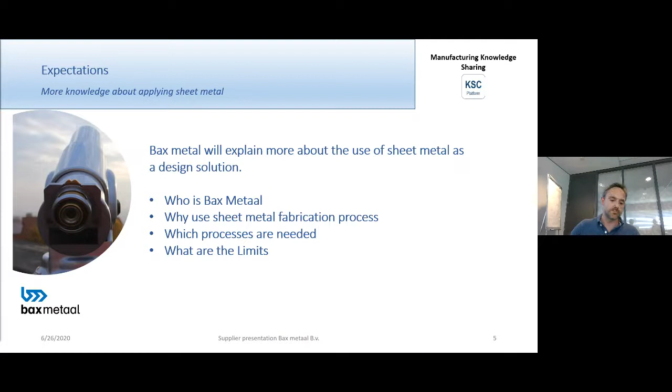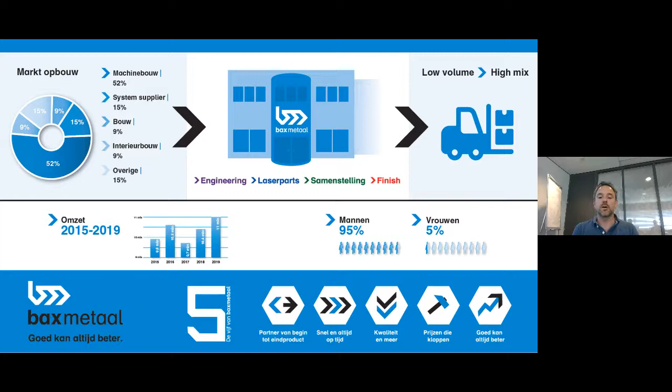I will explain more about the solutions that we offer in sheet metal. I'm going to tell you who is Bax Metaal, why you should use sheet metal, which processes are needed to produce sheet metal parts, and what are the limits. So starting with who is Bax Metaal. I'm going to show you in the next two slides. The first one, we have an overview of how our client base is divided. On the left top corner, you see that the biggest part of our clients are OEMers, original equipment manufacturers, then system suppliers, a little bit construction, and some other markets.

Moving to the right, you see our core processes at Bax Metaal: engineering, laser parts, assemblies or samenstellingen as it says here, and finishing. Starting with engineering, we do mostly co-engineering. So our clients have an idea of what they want. They have a sketch, they have a first drawing, and we try to do all the smart things that we know with sheet metal or tubing, mainly based on laser cutting, and try to put in some value that way.

At laser parts, we laser cut the base parts, the products. At assembly, we do the bending, the preparation before welding and bending, and the final assembly of the parts. And at finish, we do the finishing of stainless steel products. That's glass bead blasting, ceramic blasting, and we do the cleaning of the products there. We can clean from grade 4 to grade 2. So grade 2 surface, that's the highest grade that we can offer.

So our product mix is really low volume, high mix. You see it more and more in our markets. The number of orders, the number of pieces to make is declining, and the difficulty of products is growing. So yeah, that's something we have to deal with. Then lower you see our revenues over the past couple of years. Not as big as ASML's, unfortunately, but for us it's good.

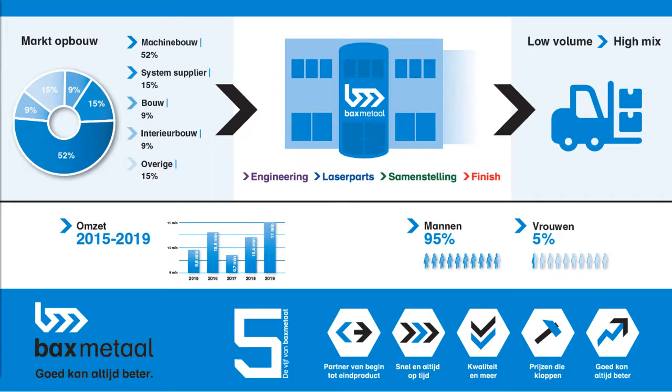The build-up of the people working at Bax Metaal, mostly it's a man's world still, only 5% female. We also have some females working on the workplace, so that's nice to have, I think. And we'll try to encourage it, but it's not that challenging, not that good for women, I think. Then the next slide.

Bax Metaal processes mainly stainless steel. 95% of the material that we process is stainless steel. The most common sorts that we use are 304 and 316, of which the 316 material is more corrosion resistant. That's because of the way the material is built up. It has some more molybdenum, and that's why the corrosion resistance is higher.

Both of the materials are non-magnetic. There are magnetic stainless steel sorts, but that's more in the 430 series. Those materials have a higher grade of carbon in it, and that's why they are magnetic. The base plates that we use at Bax Metaal are different sizes. We can use from 4 by 2 meters to 1 by 1 meters.

And that's the base plates that we lay the products in, so we try to make the most optimal nesting in the product to get the most parts from one base plate. The thickness that we can use ranges from 1 to 30 millimeters. And I have to say that 30 millimeters we don't use that often. The most we use is 1 to 4 millimeters.

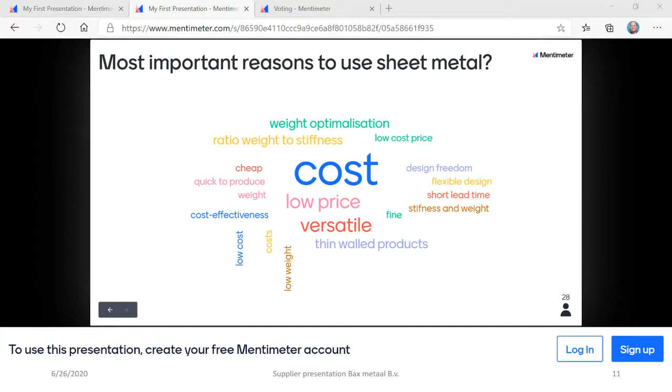Okay, let's go back to the slides. We're going to move on. So which processes are needed? I'm going to talk about laser cutting, and as I told you guys, it would seem cool to me if I could take you on a virtual tour of our factory. So all these processes I'm going to show to you in a video, and I'm going to talk through the video to explain what we're seeing. So I'm going to start with laser cutting in general. That's not a video, but the next one is.

Laser cutting of sheet metal and deburring, then laser cutting of tube. Then I'm going to show you the preparation we do before bending and welding. Then the bending of sheet metal. The next film will be welding of sheet metal and tube and some smart things we try to do there. And then something about the after treatment, so that's the glass bead blasting and ceramic blasting. And finally the cleaning. So the first video is going to start.

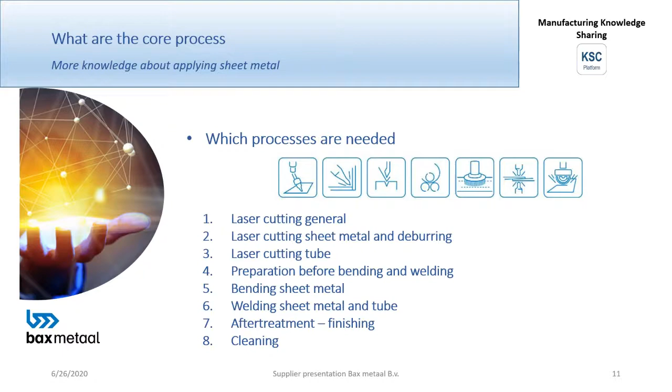I hope. Yes, the sheet. First, the sheets. I'm sorry. Yes, the laser cutting in general.

So to the right, you see the laser head. As you see, the laser beam is transported via a mirror to the nozzle. There the laser beam is concentrated to a width of 0.2 millimeters, and with that concentrated laser beam we can cut a workpiece or a product out of a base plate. The product can have all types of different shapes and sizes. So that's how the laser cutting works.

We have two types of lasers at Bax Metaal. That's the CO2 laser, and we use it for thicker materials. And we have the fiber laser that we use for thinner materials, and we can use it for different types of material.

For example, copper we can cut with a fiber laser, but we can't cut it with a CO2 laser. The speeds of the laser range between 0.5 and 10 meters per minute, where the fiber laser is the fastest of the two in the thinner sheets.

The tolerance that we use at Bax Metaal is the ISO 9013, where the smaller measurements have a higher tolerance than the greater measurements. So the longer the piece, the higher the tolerance will be. In general, we use a tolerance on laser cutting of 0.2 millimeters.

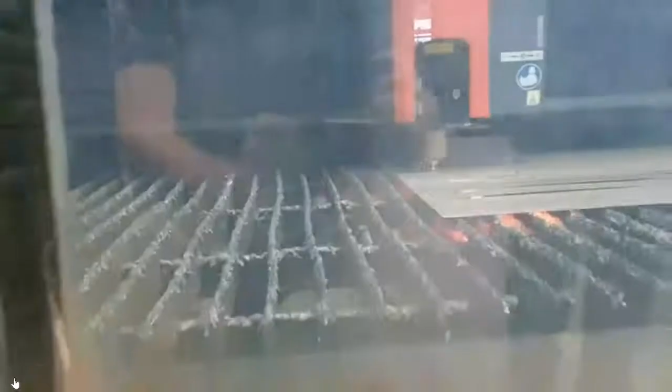Here we see the laser cutter. That's the CO2 laser that we see. Here you see the head of the laser that I talked about. The rough area that you see in the film, that's the bed that the base plate is laid on. And this explains why we always have a good side on the plate and a lesser side. So the lower side of the plate always gets a little bit of damage from the bed it's laid on.

If we cut products that are used for grade 2, we use a special bed that's filled with aluminum rings, so the base plate does not get scratched or, how do you say it? Damaged. Yes, thank you. Move on, please.

Now you see the laser cutter, it's cutting out the products. And if you just freeze here, yes, very nice. You see the big sparks on the other side. As I told you, the laser beam is concentrated to a width of 0.2 millimeters. And then we can choose between 2 types of gas, oxygen and nitrogen, which we blow under high pressure. We blow the molten material out from between the sheets. So that's what you see here. That's where the big spray is coming from.

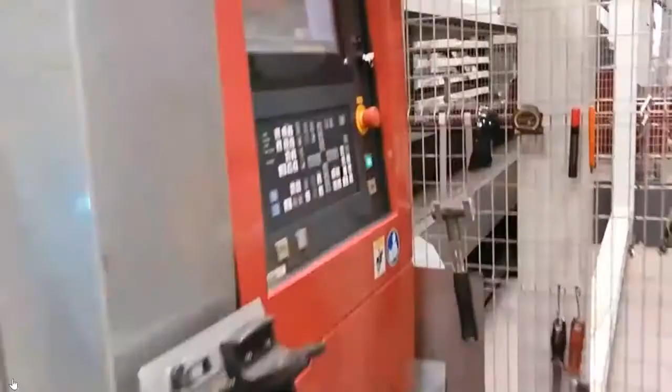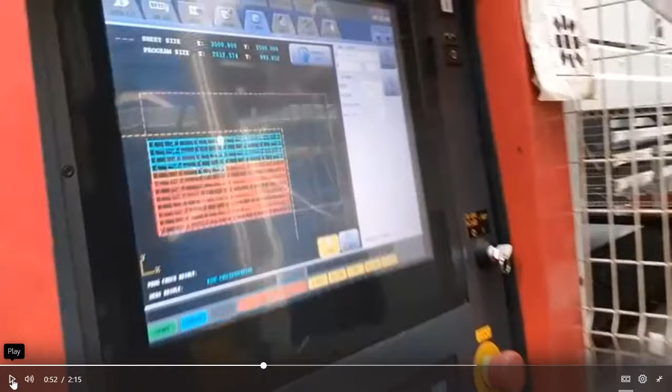So now we're moving on to look at how the machine is running its program. If you could freeze here, thank you. This is the machine running its program. You see the red parts that have already been cut. The blue parts are still waiting to be cut. The software makes an optimum nesting from the parts that we put in. So it determines from the shapes and the sizes of the product how many we can get out of one base plate, and then it makes the most optimal nesting.

Here you see the machine, the little dot, that's the laser head moving. So there you see how far it is. A little bit further, please. Thank you. Here you see a loading and unloading station. I talked about the blue pallets that we use during daytime. During daytime we cut smaller plates. At nighttime we use the loading and unloading tower that you see here for keeping the machine going at night. The machine unloads itself and puts the plates on the white pallets that you see, and then it goes into the tower, and the next morning we can get them out and sort them.

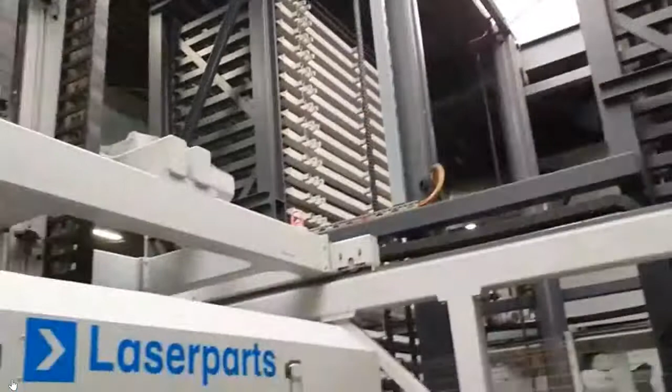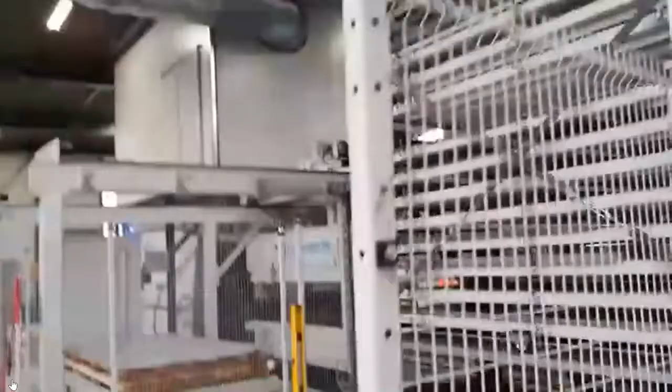You see the cut products that are waiting to be sorted. The tower again. And here you see some rest material waiting to be scrapped. Now we're going to the deburring process. Here you see one of the plates being deburred in the machines that we use for that process. Pause a bit.

You can't see it in this picture, but in front there's a grinding sheet. The grinding sheet takes off the most rough edges of the plate, and then these two brushes make a nice round edge. So when you get your product, it will be hand friendly. You don't have any sharp edges anymore, and it can be used in further processes. Here you see the product being deburred and the edges being rounded.

So it's just a bit of filming that we did on the job. As you see, it's not a professional movie.

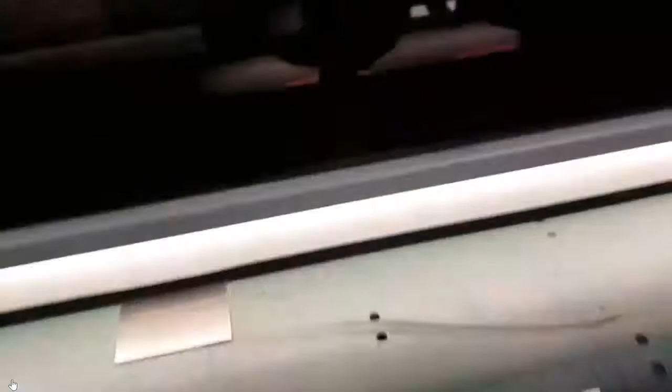Here the product is coming out of the machine, and here you see the nice round edges. All the damage is done. It's gone, I think.

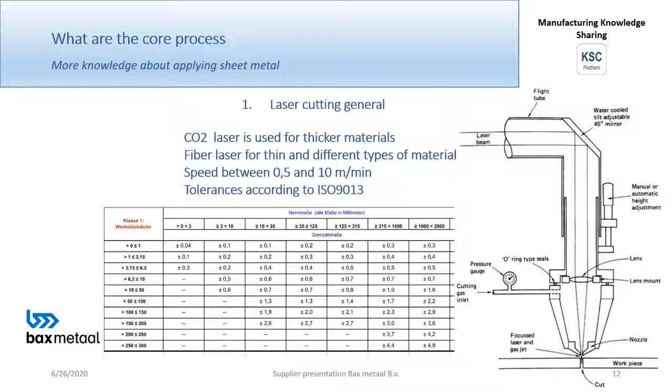Okay, thank you. And then to the next film. Right. How's it? The rest are all clips.

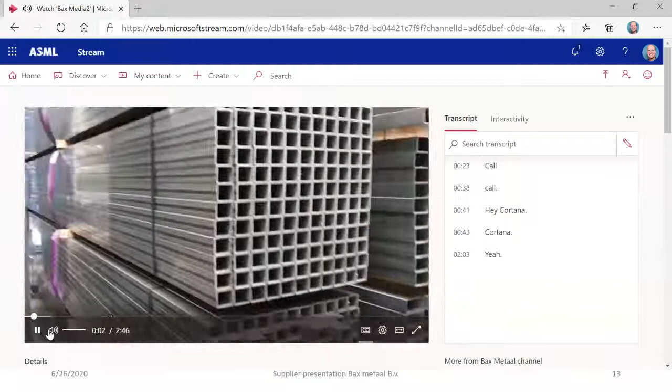Okay. The next one will be about the laser cutting of tube. So here it goes. Now, here we see the stock that we have of tubes. Also a lot of stock. They come in bundles, the tubes.

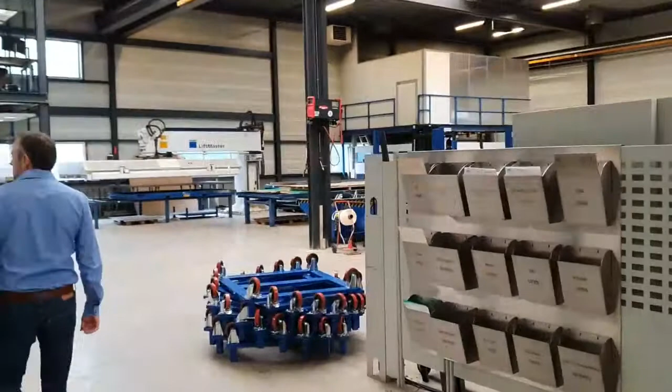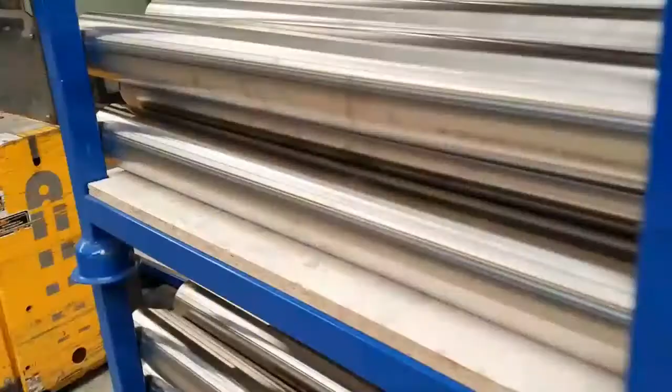And that's also one of the reasons that it's a bit challenging when we're cutting tube, because the tubes are a bulk product. They're fabricated in great numbers. Then the tolerances of the tube are very, very high. Or low, I don't know how to explain it, but the geometry of the tube can vary. And it can vary so much that the tube is less accurate than our laser is. So we can only be as accurate as the tube is. And that's a challenge that we have to face every day.

Here you see the machine loading one profile. In this case, an angular profile. So if this profile would be a little bit bent, then it influences the tolerance on the end product. And there's nothing we can do about that. Here the profile is loaded into the machine.

So the machine is going to do a measurement of the profile. And that's done. Yes. Here the machine is measuring the profile, the length of the profile, so we know exactly how long it is. And now you can see the profile is going to be loaded into a gripper. And the gripper, that's the reason why we can't cut a full profile. The profiles that we use are 6 meters. But we only can use 5.8 meters because we have to hold the profile in the end.

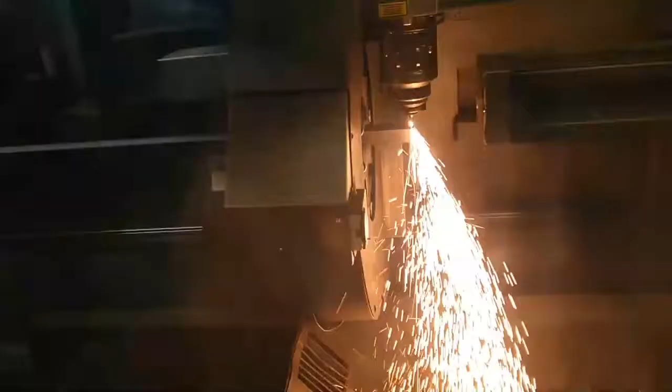So now you're going to see the cutting of the profile. You have 2 angular cuts, and it can be anything that you think of. We can cut into a tube, and then the product is already finished. So now we can go to the next clip. So that's the cutting of tube.

Now I want to show you guys some more. We're going to take the next step in our factory, and that's the preparation before bending and welding.

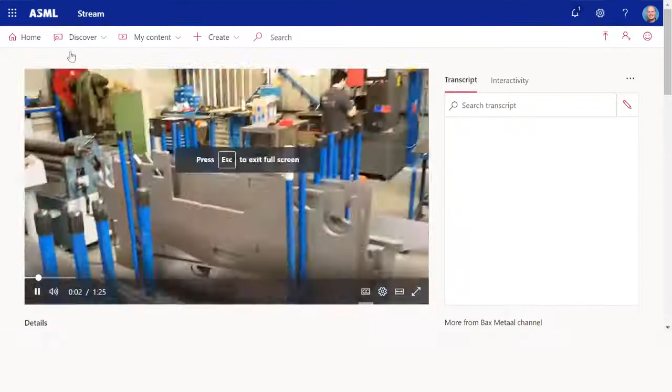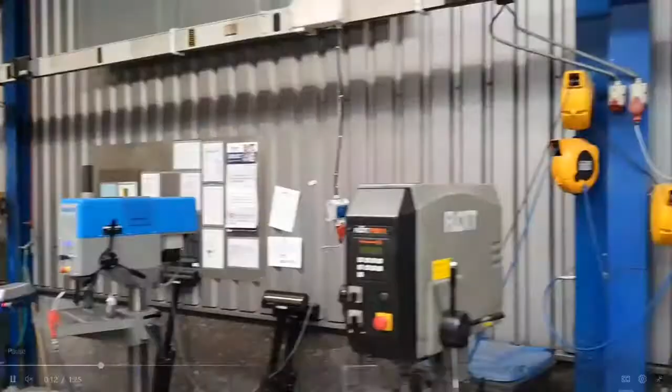So the sound. In practice, you see that the preparation that we do for bending and welding is, wait a minute. Okay, could you pause for a bit?

The preparation that we do for bending and welding is a lot of handwork, because as I explained to you earlier, the product flow is very low volume, high mix. So for these types of plates, maybe I only make 3 of these plates. It's not economically valid or affordable to make a CNC program and to do it, how do you say it, on a machine. So it's a lot of manual work.

So here you see the cutting of thread done manually. Now we're going to see a countersunk hole that's going to be made also manually. And if this would be a larger number of products, then we would do it on a CNC machine. It would go automatically.

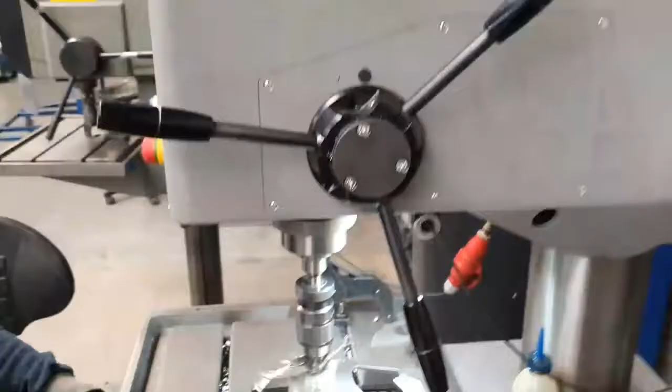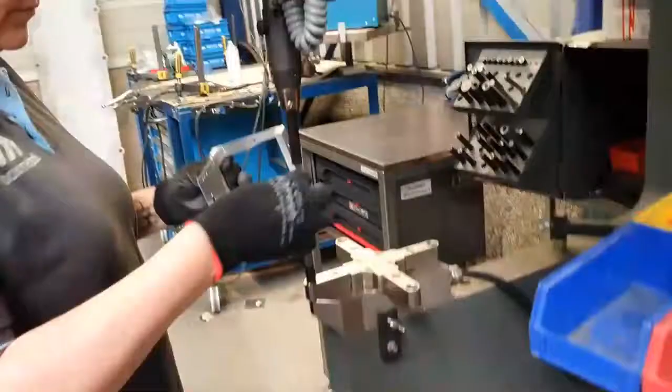Here we go to the inserting of a threaded bush. So here you see the bush being inserted in the plate, in the product. So there's all types of shapes and sizes of bushes. You guys know, I think you know about it. So this is the machinery that we use for this process.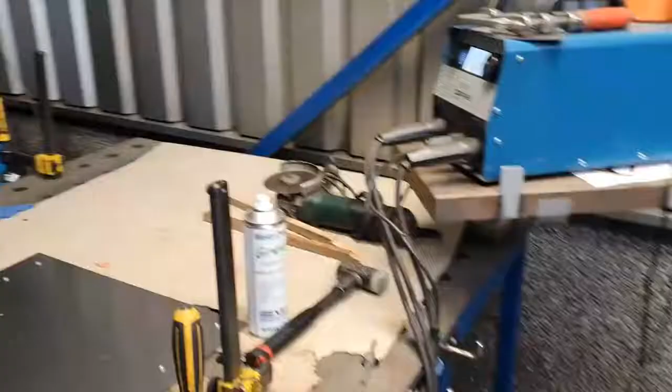And here you see the welding of a welding stud. We have a mold plate so that we can keep the welding stud in place, and then it's fixed to the plate. So these are typical processes that need to be done just before the bending and the welding.

So moving on to the next slide, and that's the bending of sheet metal. I'm going to start with the overview of our factory.

So, for this part, I will need a lot of pausing. If you could pause.

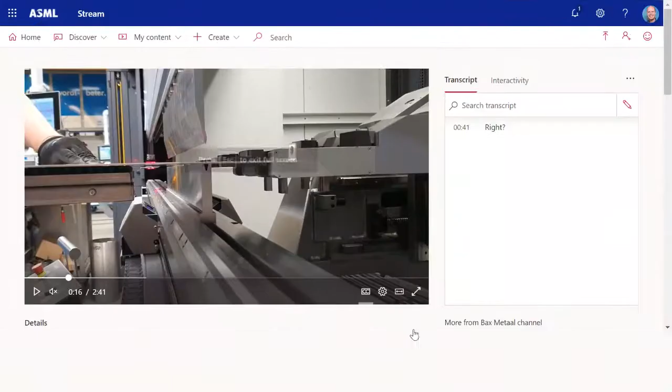Thank you. What I would like to show you guys is the difficulty that we face when bending plates. Here you see the upper part of the tool and the lower part of the tool. The lower part has a V-groove, and the size of that V-groove is determined by the thickness of the sheet. The upper part has to push the material with enough pressure to achieve the angle that we want.

The pressure needed to achieve the angle is influenced by the thickness of the material, the sort of the material, and the length of the plate that you want to bend. The size of the V-groove determines the smallest bend you can make. So if I take a thicker plate, I need a bigger V-groove, and then I can only make as small a bend as the V-groove allows me to. Yeah.

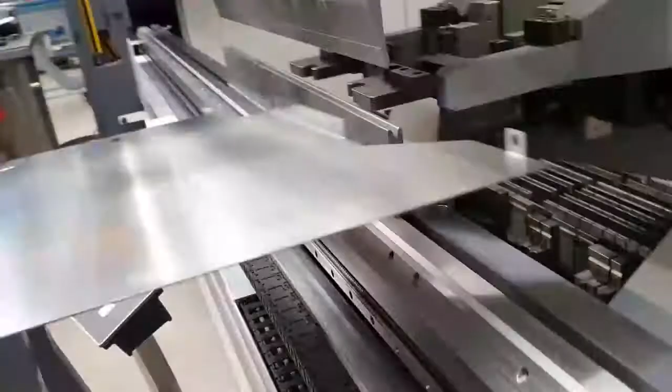So here you see the bend being made, and here the bend is done. As you can see here, the height of the bend is determined by the V-groove, but also the holes in the plate have to be far enough from the bend, because if they are too close to the bend, the holes will deform. That's something that we see every day, that designers and engineers put the holes too close to the bend, and then the holes will deform because the sheet will be pulled into the bend.

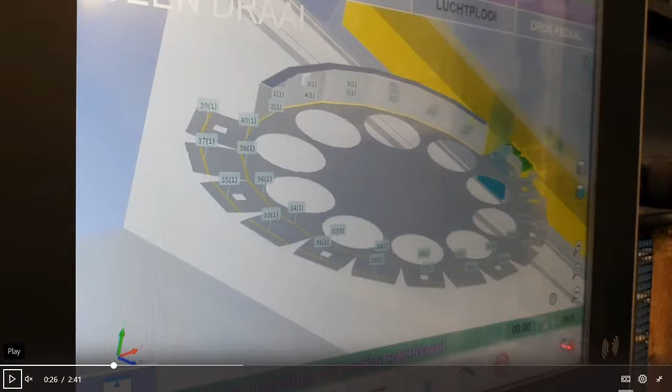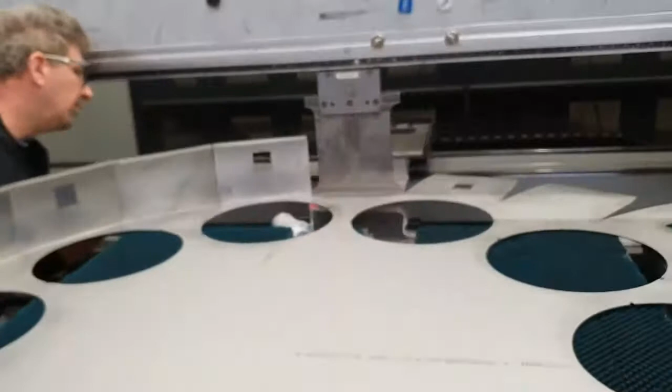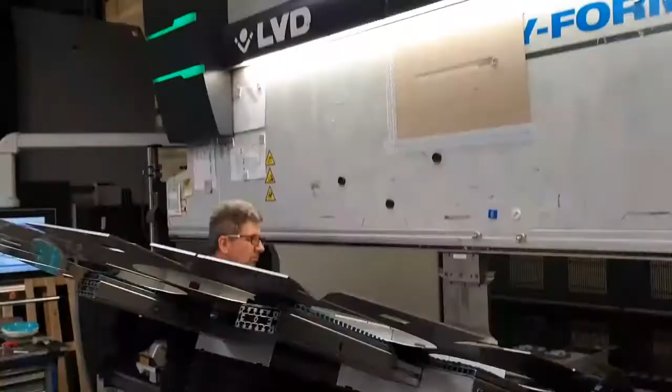Here we see another product that needs to be bent. Everything at Bax Metaal in the bending department is done offline. So all the programs are made in our engineering department. None of the programs are made at the machine. And here we see a big plate being bent. Here the guys have some help from the machine. We have two bending helps that lift the plate. So when we have to bend big plates, the bending is done accurately and the guys have some help.

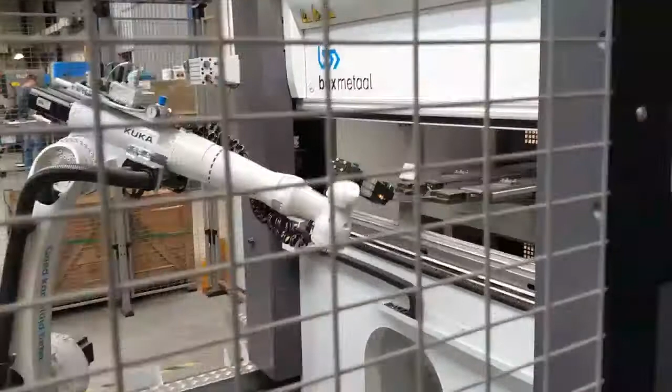Now here we have something that's new at Bax Metaal. We invested in a Dynacell, and that's a robot combined with a bending machine. We use it for types of work that don't fit the people that work at Bax Metaal. The people working at Bax Metaal are all craftsmen, and they like to do daily what they're good at. So they like to think about how they can make difficult products, and they don't like to make easy products

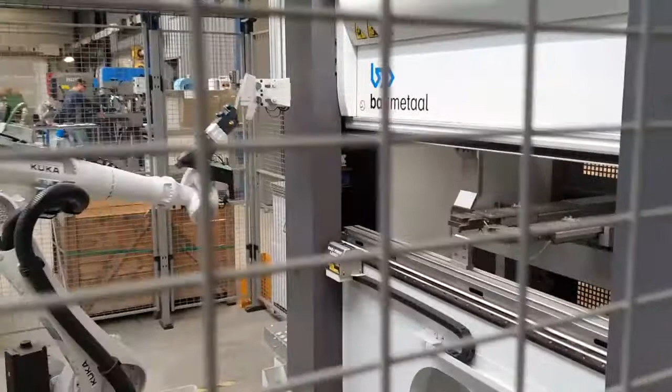in high numbers. So that is where the Dynacell comes in. It can make the easier products that we make in higher numbers, and we put them on this machine so our craftsmen can focus on the task at hand, and that's the difficult parts. It's also programmed offline completely.

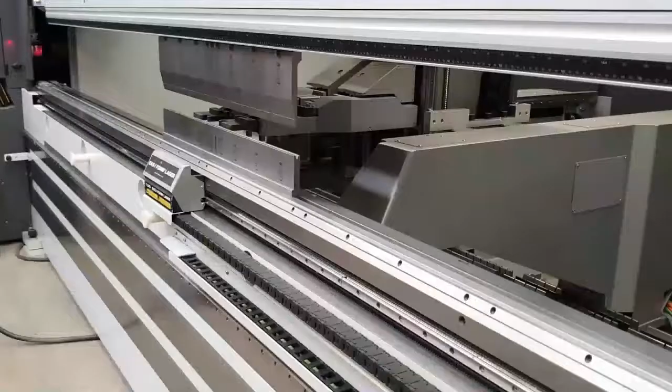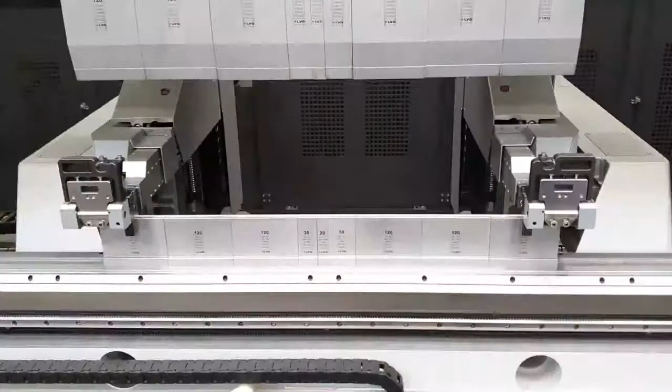Here we see another help for the men working with the machines. This is a tool cell bending machine, also programmed offline, and it builds up its own tooling. So the tooling is taken from a magazine at the end of the machine and is built up according to the program made. Here we see the program that's running, and we see that the machine is building up the tool set just as programmed. So years ago we had to do it by hand, and now it's all done by the machine.

So moving on to the next step, the welding of sheet metal and tubes. So after the bending, the parts go to our welding department, and there they are assembled to end products.

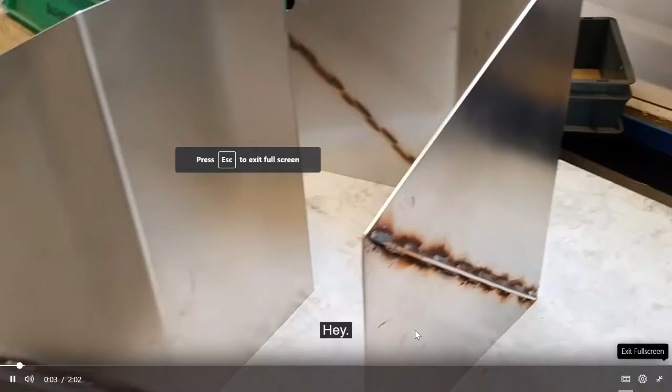So let's wait on the film to start. Go back a bit

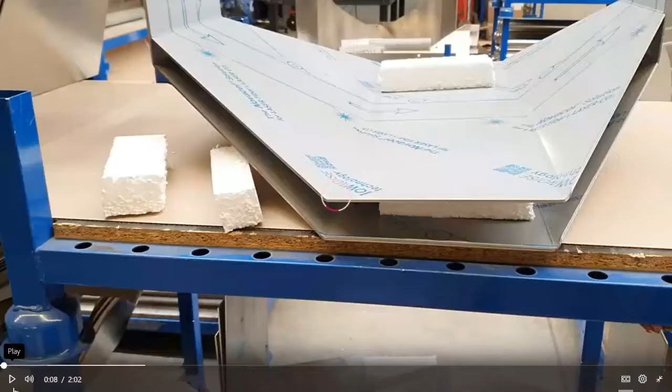Here we see one of the two welding processes that I want to show you, and this is TIG welding. It's tungsten inert gas welding. And the way this process works is we have a torch, and in that torch is a tungsten rod, and the tungsten rod pulls an arc between the workpiece and the rod itself. So that arc is hot enough

to melt the material, and the welder in this case has the freedom or the opportunity to choose if he wants to add material or not. So he can weld just two plates together, just melt them together, or he can choose to make a stronger, bigger weld by adding a stainless steel rod and, in that case, making a bigger weld.

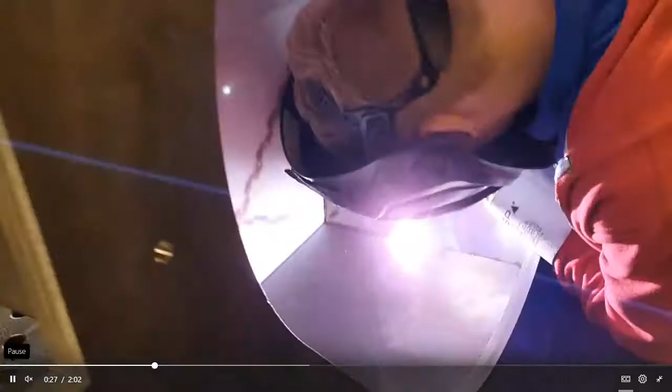So here we see just melting two plates together, and on the outside here we see another process. So this torch you see has a thread coming out of it, and that's the MIG process. This process is used often for thicker sheets, and the welder does not have the freedom or the option to add a material or not. It just does. So the thread comes out of the machine, and by coming out of the machine, an arc is formed, and the thread is put into the weld, so we get a much thicker and stronger weld. So it's often for thicker sheets.

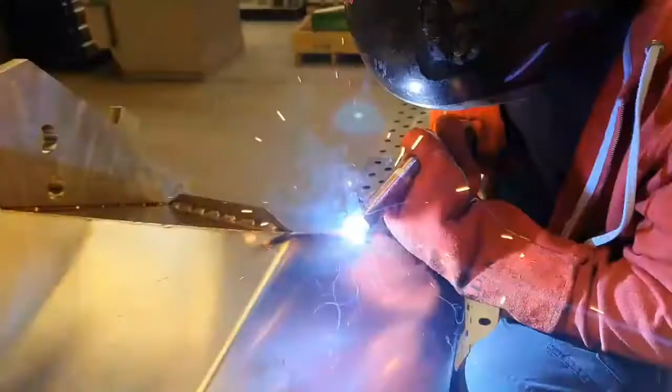Yeah. So here we see the welding start, and you see the thread coming out. You see the sparking, that's the thread coming to the plate. So that's the weld. So this is for, it gives a much thicker weld.

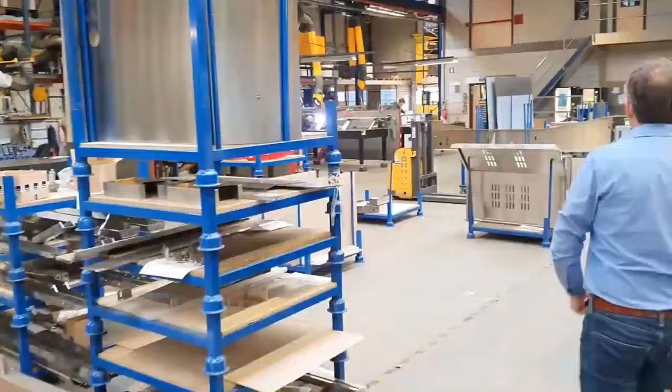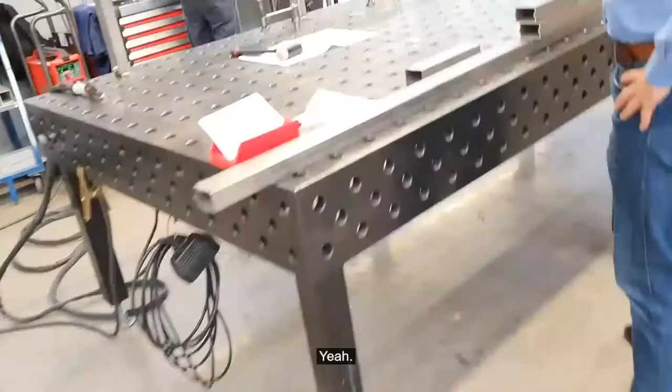So here you have an overview of our welding department. As you see, we're very busy. You see products waiting to be finished. You see plates bent and waiting to be assembled. You see the workplaces of our welders. Here you see a product being assembled. So all types of positions we need to weld in. And here you see tubing that's waiting to be welded.

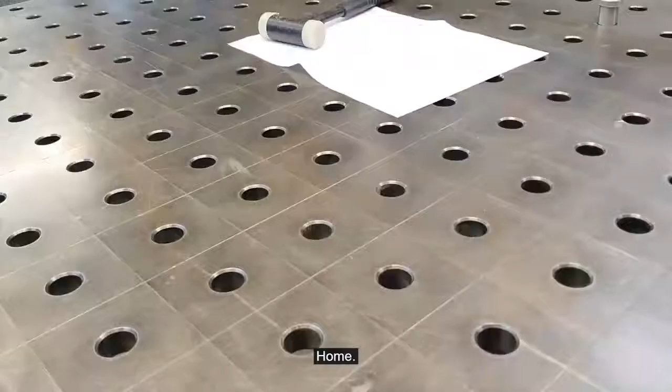And as you can see, we have a male and female connection in this tube. That's with our tube laser. So we do that in order to get a really accurate measurement between two parts. So we provide one part with the female side and one part with the male side, and we can put those two together, and then, as you can see, they fit perfectly, and then the measurement from the one part to the other part will be very, very accurate, up to I think 0.3 millimeters.

Here you see the principle of our table. So we put in these types of tools. Our tables have a lot of holes in them, and maybe you ask yourself why are there all those holes in the table? Now they're for putting tools on the table. The tools have a very flat and angular side. We can use it to make good and straight products.

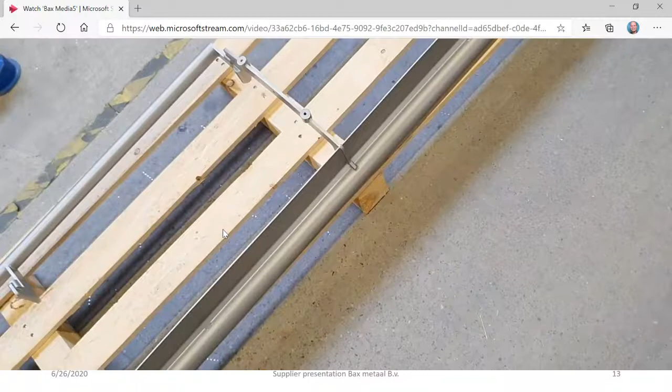So that's the welding at Bax Metaal. Now moving on to the next one, and that's the after treatment of stainless steel. I hope you guys enjoy this virtual tour of a factory.

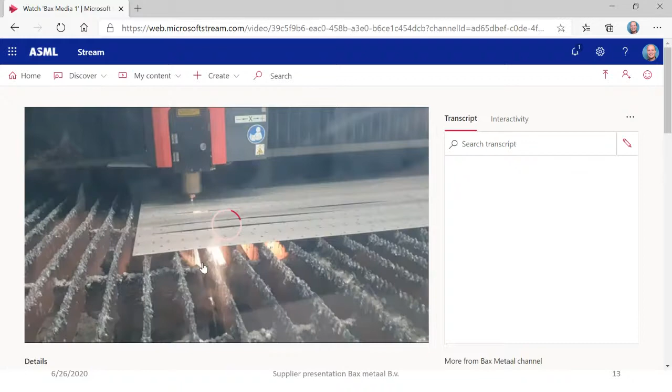Oh, this is the first video. Maybe we wait for the sixth. Yeah, that's the one.

Just wait to buffer the movie a bit so we don't have lagging. Okay. We still have lagging. Okay, now it's go. Just pause here. Yeah, thank you.

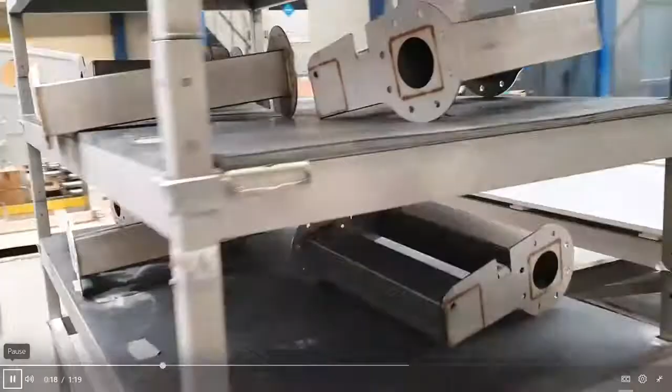At average finish, we do the glass bead and ceramic blasting, and we do that in order to make a nice and equal surface on the products. So as you see here, the products are waiting to be glass bead blasted, and they still have the discoloration of the welds. And you see the surface of the tube, it's not even. So we're gonna make that nice and even in the blasting chamber that we're gonna see in a bit.

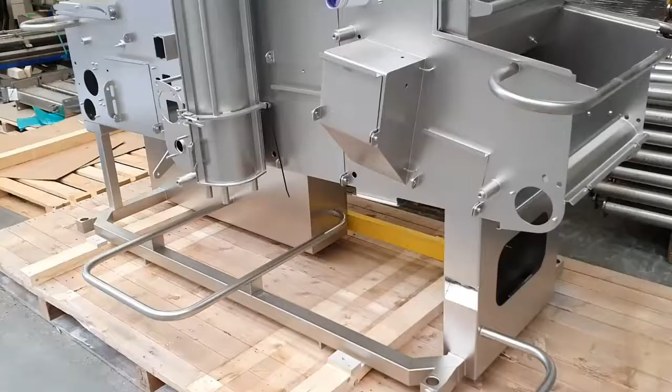So here you see him swirling around to even the pressure. So here we see a finished product. Here you see all the welds everywhere. The discoloration is completely gone. The surface is nice and equal. So this is the end result after the blasting process.

Something else we do at average finish is grinding. We grind for aesthetic reasons, but also for providing the surface with a predetermined roughness. So if you want the surface to have a roughness of, let's say, 0.2 Ra, then we can make sure that the surface is exactly that roughness. We can also supply a measurement with that. And yeah, in practice, it's a lot of manual labor because all the products have different shapes and sizes, and there's no machinery that's equipped for that.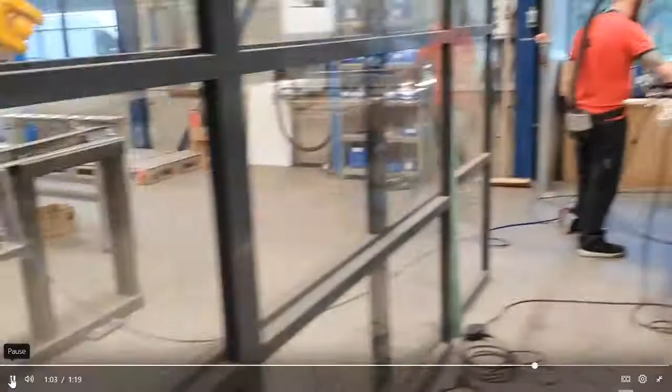So here we see the manual part, and here we see a robot, and that is only used for I think 5 types of product that are all programmed in, and we do a lot of numbers in. So also here at FVS Finish, we try to, take advantage is not a good word, but we like to have our people excel in their craftsmanship, and the machine has to do the numbing work.

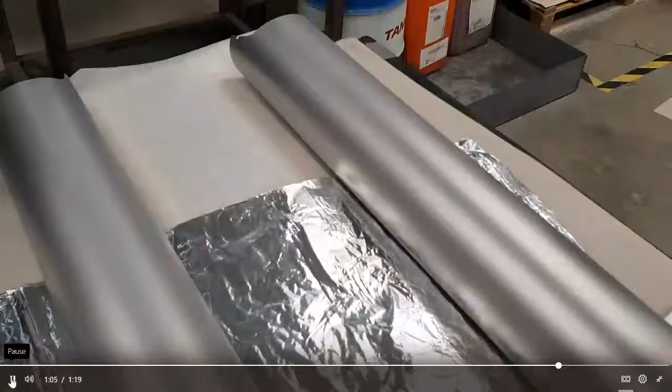Here we see another thing we do at FVS Finish called etching. We have a film, we go over it with etching machinery, and then we have a nice print of a text or a logo. In this case, both. So we have a nice finished product here.

Okay, then the final step in our process, that's the cleaning, and that's done not only for ASML. So we also have a lot of clients that deliver to you, so the second tiers, and they come to us to do the cleaning of their products, and it's done by FVS Clean.

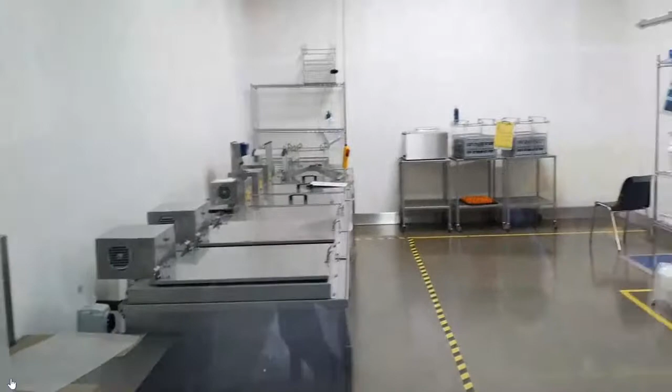So here you see the cleaning baths, the ultrasound chambers. Here you see some products packed and ready for final inspection, so in the double bag. Here we see the new machine of FVS Clean. And here we go to the, how do you say, the clean room.

The small flow chamber you see, that's used for packaging small stuff, so smaller parts. And then here the bigger clean room. It's not as big as you guys have, but for us it's good enough. We use it for making end assemblies and also for packing larger products.

So she's happy to be on the film, you see.

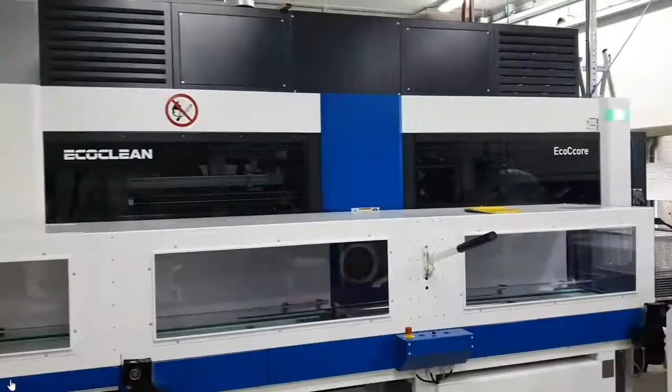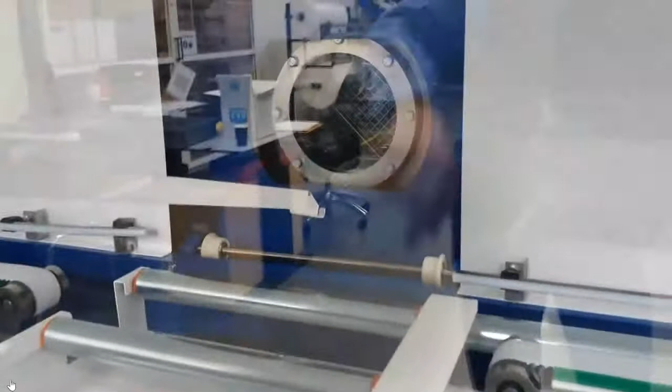Here we see the newer machine at FVS Clean, and it's a machine to do the grade 2 surface cleaning process. So the products are put into the bin, and here you see the basket or the bin in the machine. All types of chemicals are sprayed on the products. The bin will be turning, and in that way the surface will be very clean, up to grade 2 surface cleaning. So it's not vacuum cleaning, but it's grade 2 surface.

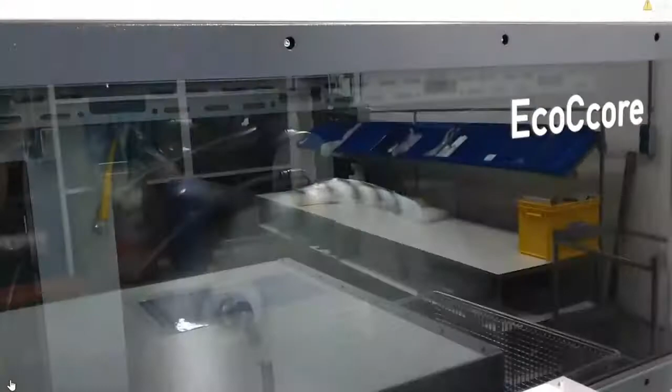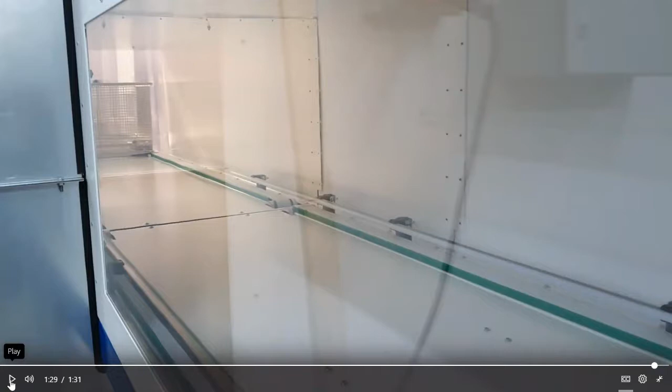Here we see the large container for the chemical liquids. And here the other side of the machine, also containing liquids to do the cleaning. And here we see the conveyor on which the clean products go into our clean room, and from there on it's taken by the people working in the clean room, and they use it to package it in the correct way.

So that's the final process in our factory. So I hope you enjoyed this way of presenting. The thinking about it was to take you on a virtual tour, to show you what we do daily, and I hope we've achieved that.

Thank you. So I hope you now have a better understanding of the possibilities of the techniques we use. I explained a little bit of the challenges that we face, and here also we'd like you to go to the chat and let us know what challenges you see, and maybe we can converse about it in a couple of minutes. So thank you very much, and thank you for listening.

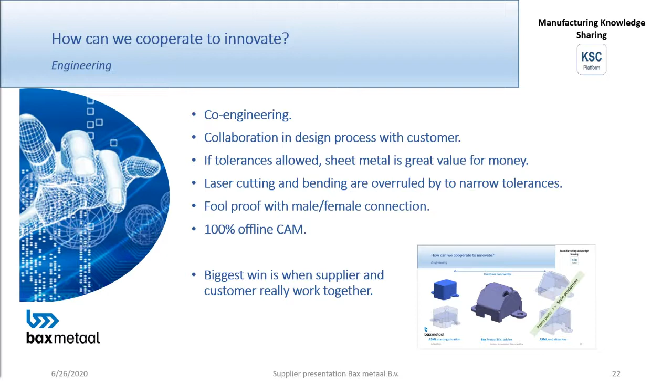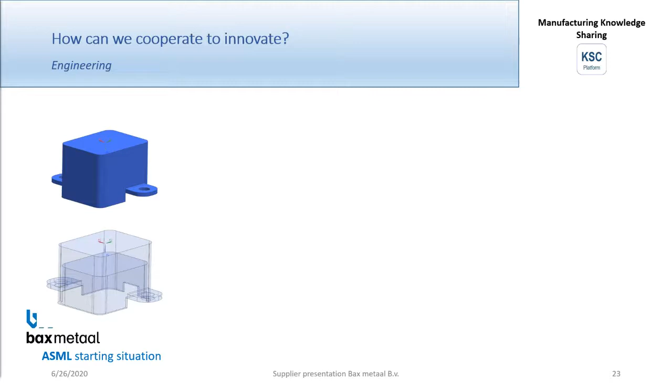Here you see the end conclusion. The biggest win is when supplier and customer really work together, and also at the right time. So not afterwards, but if it's needed, at the beginning. Now here you see an example coming. At the left you see an example we did in real time. There was a design, a base model, and there were some questions. How can we make it? It's communicated at first. What options do we have? Then we came with an advice,

and the advice in this case was for spot welding. The start of the product was 0.5 millimeters thick, and we gave the advice to change it to 1 millimeter if it suits the space claim, and we gave a direction on what to bend and what not to bend. So it's first time right, and you see that from the beginning of the collaboration till the products are delivered is a duration of 2 weeks. So that's very nice.

So you can see a simple product, or it looks like a simple product. It also looks like a big product, but it's only 15 millimeters in diameter. So it's very small, and this is a nice example of how you can work fast together and use the strength of each other.